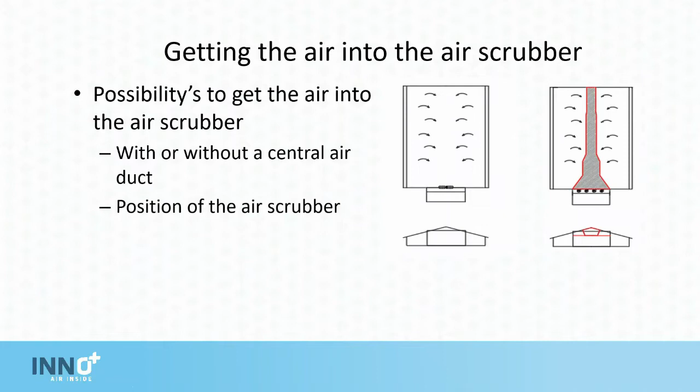If the air scrubber is placed at the back of the house, there must be a wall of fans that sucks the air into the scrubber. This is also the main ventilation of your house. In between the fans and the scrubber is a pressure chamber. A pressure chamber is needed in all situations.

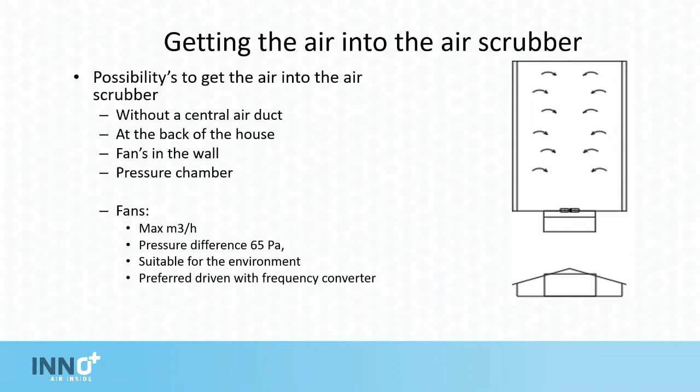For the fans themselves, the maximum amount of air depends on the type of animals and the amount of animals. The total amount of air going through the scrubber depends on the summer or maximum amount of m3/h, depending on your climate settings. The fans should be able to cope with the pressure drop of the air scrubber of 65 Pascal, and it's preferable that these fans are frequency controlled.

Getting the air into the air scrubber with a central air duct. We have four main features when using a central air duct: the central exhaust air duct itself, fan positioning, the pressure chamber, and the air scrubber itself.

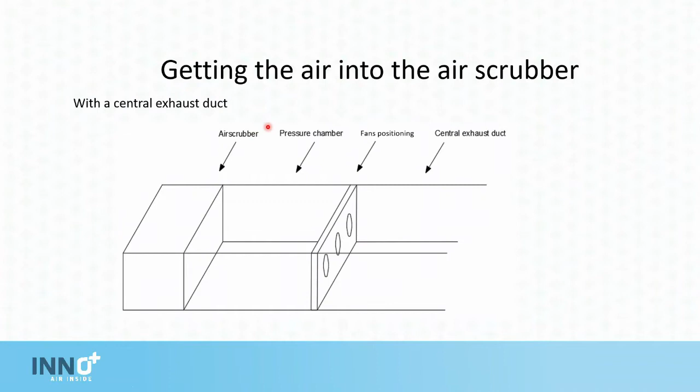Central exhaust duct. Let's have a closer look at the central exhaust duct. There are two main setups depending on where the scrubber is positioned: at the back of the house or at the side of the house. All the air of the house has to be sucked into the air duct from each department in the house. When the scrubber is standing halfway, the air is coming from two sides. By doing so, the duct can be smaller.

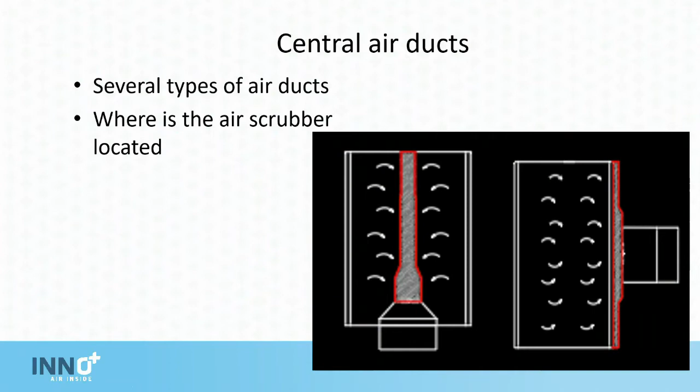There are several types of air ducts: the three where the air scrubber is standing at the back of the house, or when the scrubber is standing halfway of the house.

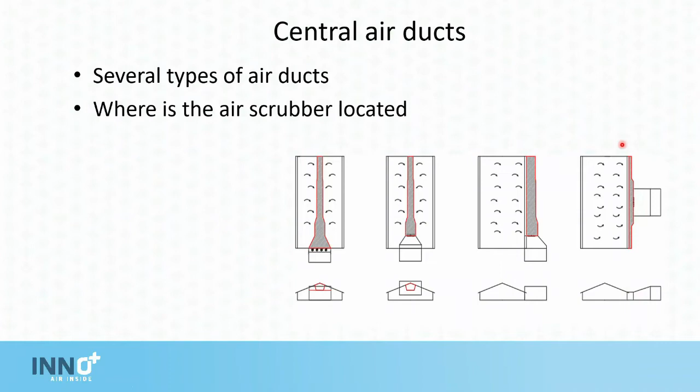Determining the size of the air duct. It's important that the air duct has as few kinks and blockages as possible, so that the air runs through as smooth as possible. The air duct must be built out of airtight materials. These materials must be resistant to ammonia. It's recommended that the materials have an insulation value with an RC of 3. By doing so, there is less chance of condensation.

Of course, the compartments have to be linked to the central air duct. An access door has to be created for maintenance access. This door functions as an underpressure door in case of a high underpressure in the air duct. For inspection and maintenance, it's good to have a light in the air duct.

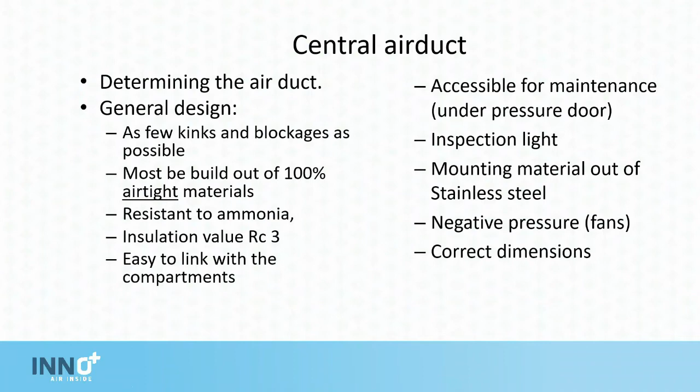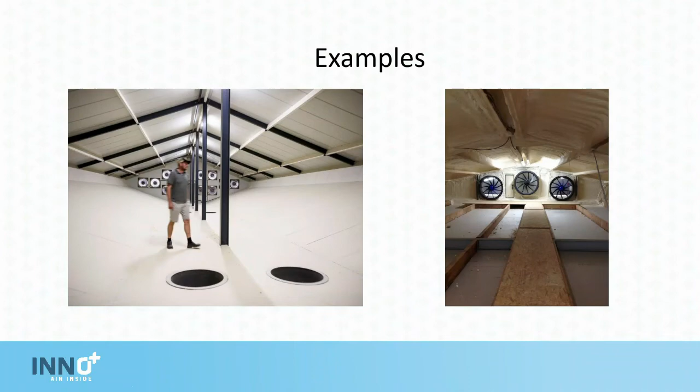Dimensioning an air duct. If we want to determine the size of an air duct, we must first have a look at the maximum air volume. This depends on the type of animals, the amount of animals and your climate settings, as said before. The maximum airspeed, Vmax, must be 2.5 meters per second.

Example: when we have 10 departments of pigs, and each department needs 10,000 cubic meters of air per hour, the total amount of air going towards the scrubber is 100,000 cubic meters per hour. Divided by 2.5 meters per second, then again divided by the 3,600 seconds in an hour, we will need 11.1 square meters of air duct.